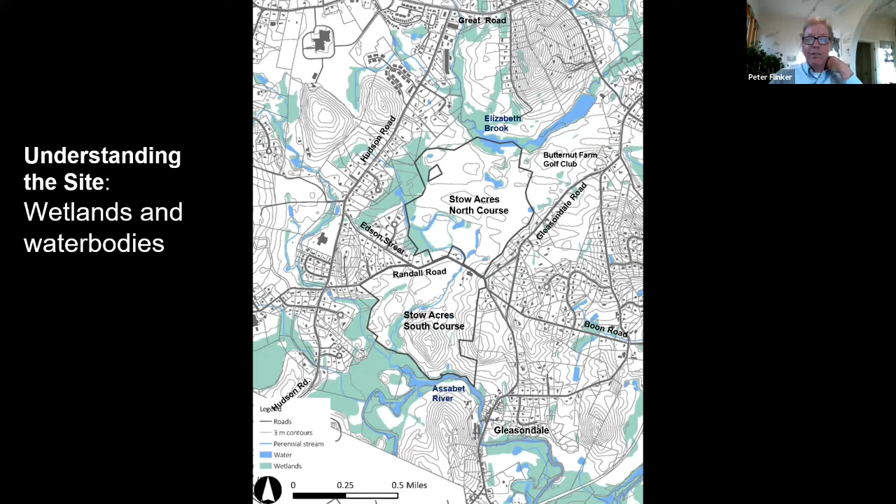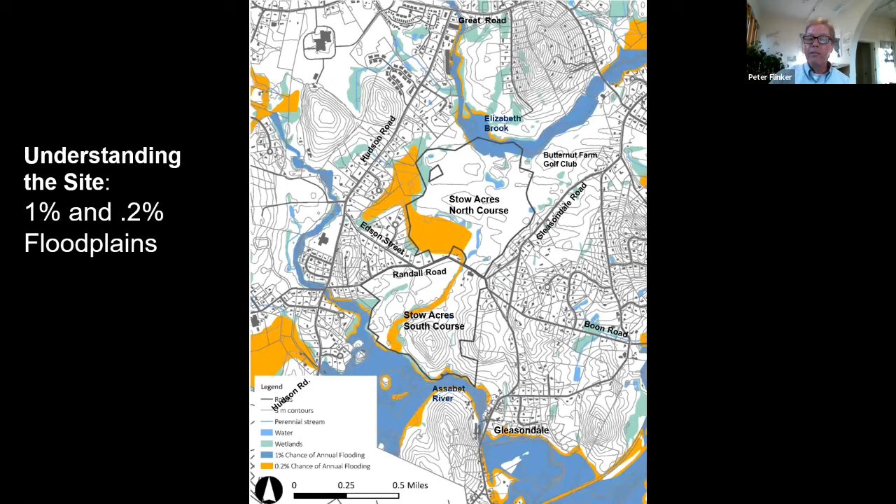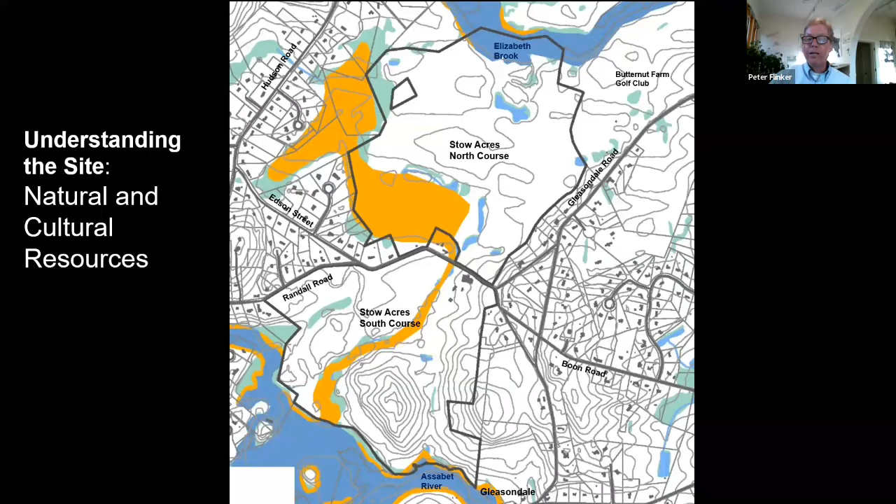We started by looking at the whole site in the context of the topography and drainage patterns in the area. We did a lot of mapping and overlaying different resources from state sources and surveys of the site, looking at wetlands and water bodies along the streams, and at areas in the floodplain that are more likely to flood during heavy rains. We also thought about how both the natural resources, the ecology, and the cultural resources, the history and scenic quality of the site, play out in the different areas of the property.

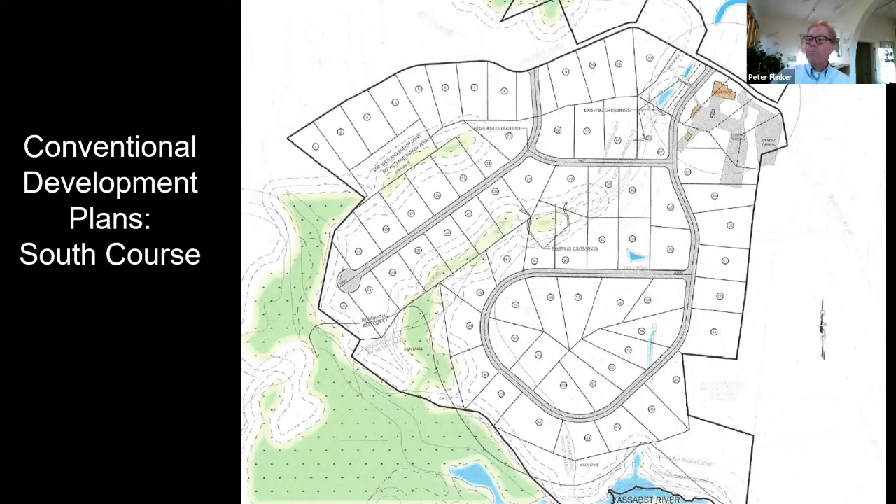This, if you attended the workshop in February, was the resulting master plan. It includes continued golf, at least for the next 10 years probably, a 9-hole golf course on 60 acres of the property. It also includes provision for perhaps 12 to 15 acres of recreational use that the town would establish through further planning and design, and what we have here is just a placeholder for that.

It includes the potential for a circumferential trail providing public walking and biking space throughout the property. As shown, this would be over 1.75 miles long. Around the site, particularly in the wetlands on the west part, there are buffer zones and reclamation areas so the native ecology could be rebuilt, perhaps even replacing some areas of the golf course with natural vegetation, bringing them back to wetlands and so on. You'll hear more about that in a little while.

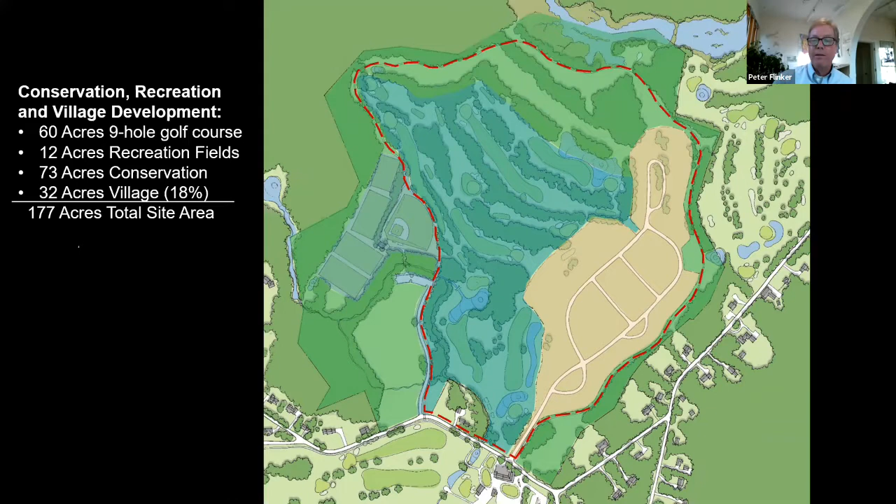Through this process, we also looked at developing part of the site as a walkable, compact village, which amounts to about 32 acres.

Looking at the entire site, we have the northern part with the different provisions for development and conservation I showed you, and then the entire south course of 151 acres would be preserved as permanent open space and kept in golf and other uses. There would also be a provision for a trail system on the south part extending from the north, from Elizabeth Brook to the Assabet River.

So if we look at the entire site of 328 acres, only about 32 acres would actually be developed for roads and buildings within the village, which is only 10%, which is really extraordinary. If you're familiar with conservation development, usually people are happy protecting half the site, but here we have the potential to protect much more.

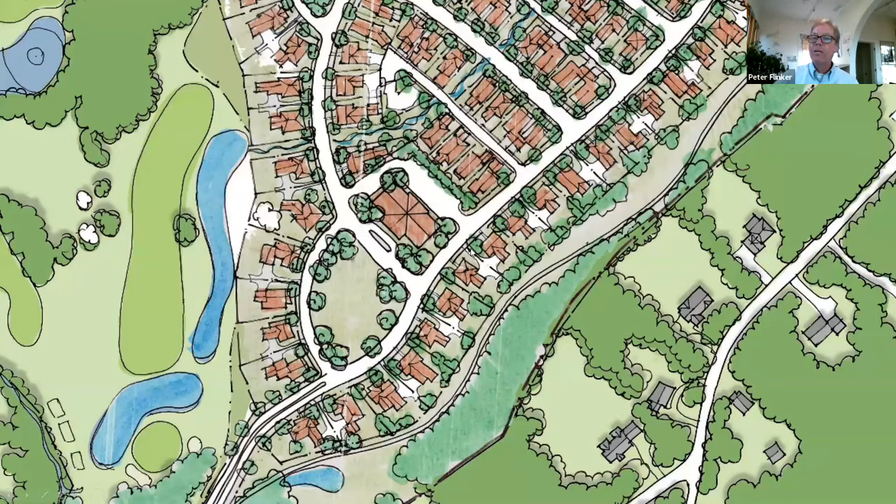So a very important part is that the buildings are organized around public spaces, whether the street or this kind of town green at the center. And we have different sizes of houses and different sizes of house lots. So there's a lot of built-in diversity.

And what that's really evolved into is this sort of guiding master plan. This includes the part of the site that's going to be developed. In addition to that, part of the development pod, if you will, are buffer zones along the outside that will incorporate that trail system, as well as setbacks against the neighboring properties.

There's areas to the north along the Elizabeth Brook, which will have the wells that'll serve the property. And again, these have to be protected along with this circular wellhead protection area. And then there's a lot of open space, as you see in green, that sort of winds through the development itself.

So we have sort of the wells to the north. We have part of it that's set aside for cottages on a shared lot, cottages on individual lots, what we call these interior lots, which have alleys in the rear providing access for garages, and exterior lots, which I'll show you have shared driveways. And then we have senior apartments, sort of in the core of the project, overlooking the town green. And then it hasn't been designed yet, but there's room for a small community center at the entrance of the property across from the Stow Acres Golf Club.

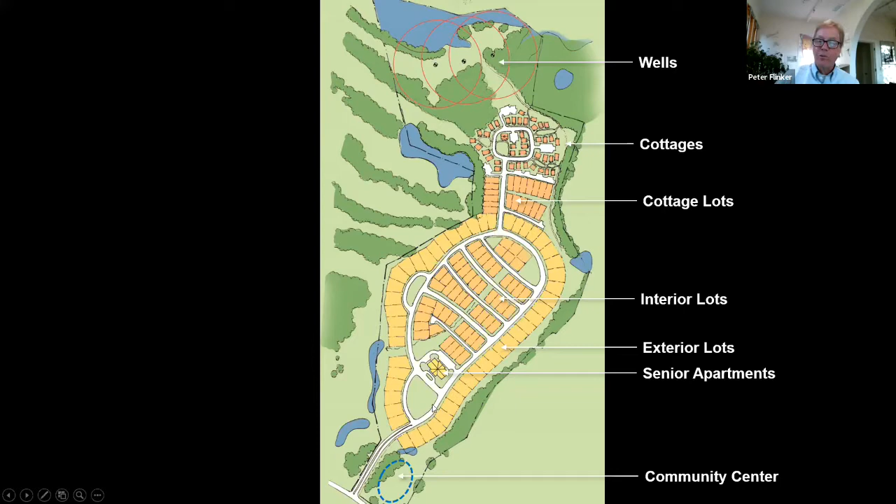So we're really going to be looking in the next few minutes at how these different lots might be arranged, again, so that they fit into the village, but also are very nice places to live. So we have these exterior lots, which are somewhat larger, and then within the property, these so-called interior lots.

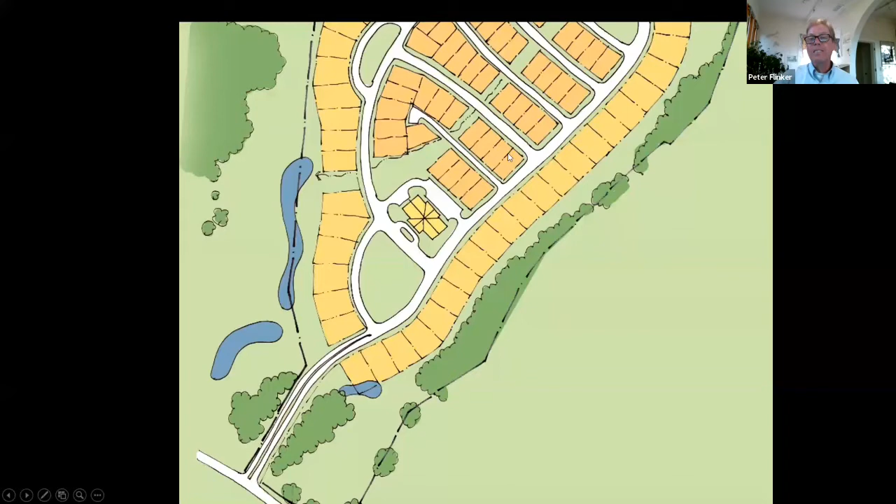So this is sort of two exterior lots. And one of the things we're trying to do, again, is to keep the parking available, but not let it dominate the scene, as it often does in a typical suburban development. So we're doing that by having shared driveways to a pair of garages that are what we call side-loaded. They're on the side of the buildings. And that allows us to eliminate half of the driveways along the street.

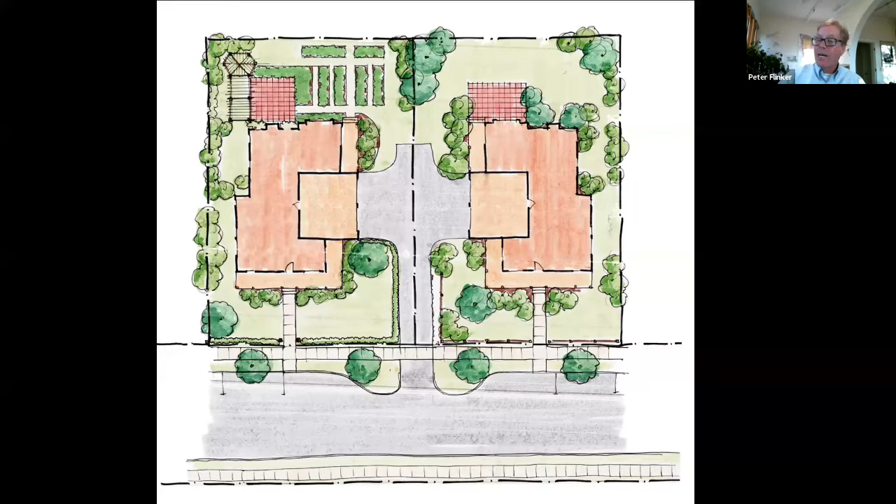And so the street can have wonderful sidewalks, street trees, and greenery, rather than a lot of parked cars and driveways. And in the rear, we have room for private gardens and patios and so on, and a lot of planting. Again, one of the advantages of having a more compact development style is that the investment in planting goes a lot further. So instead of being spread out over an acre and a half, it's used where it really can benefit in terms of creating a setting for those buildings and privacy for their inhabitants.

So again, if I could show you, 50 traditional village centers and towns in New England that people really love to live in, and they're designed much as this is designed. And so we're really picking up on those traditional planning principles.

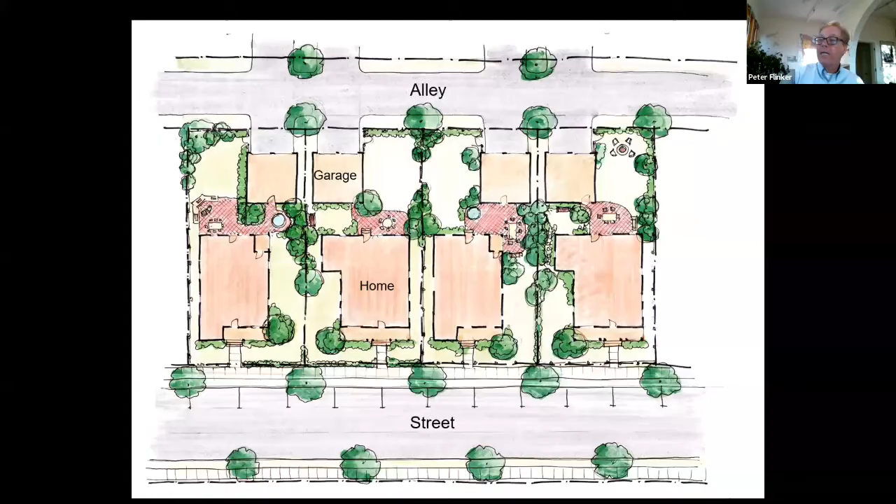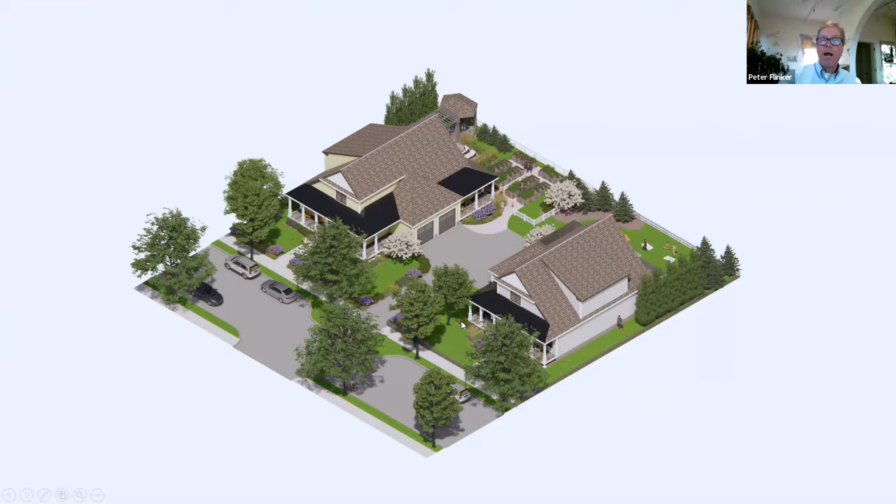And in the rear, you can see each house has room for some private gardens or just lawn space, patio space, barbecues, and what have you. And so it has all of the amenities that you might have in a larger suburban house. But here you have also the advantage of living in a wonderful village.

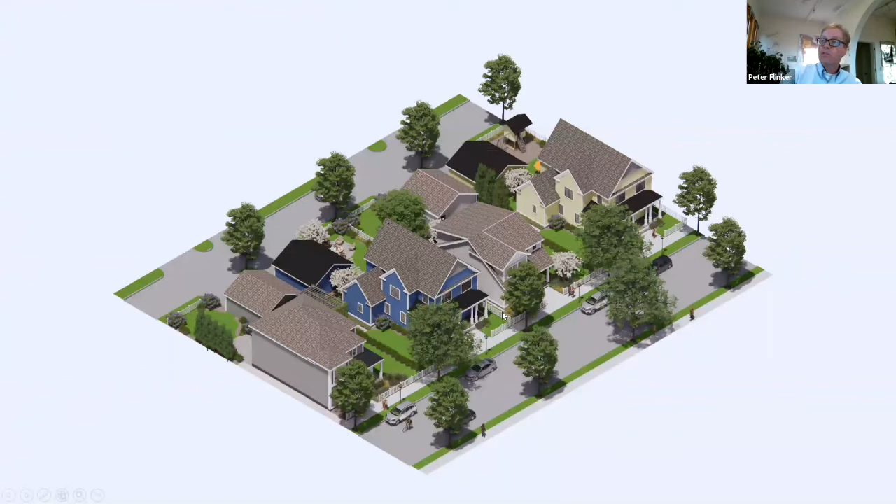And this is the lots that are with the rear, somewhat smaller lots with the rear alley, providing access to those garages. But again, it's the same idea where we have a shared village street with a separation of fences and hedges between the public sidewalk and the private gardens. And in the rear of the houses, in between the garages, we have lots of space for nice private gardens and trees and whatever people might want.

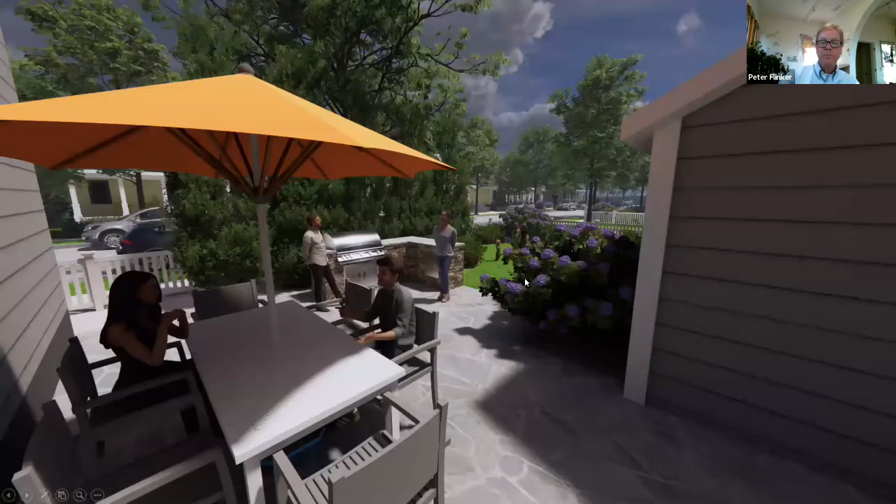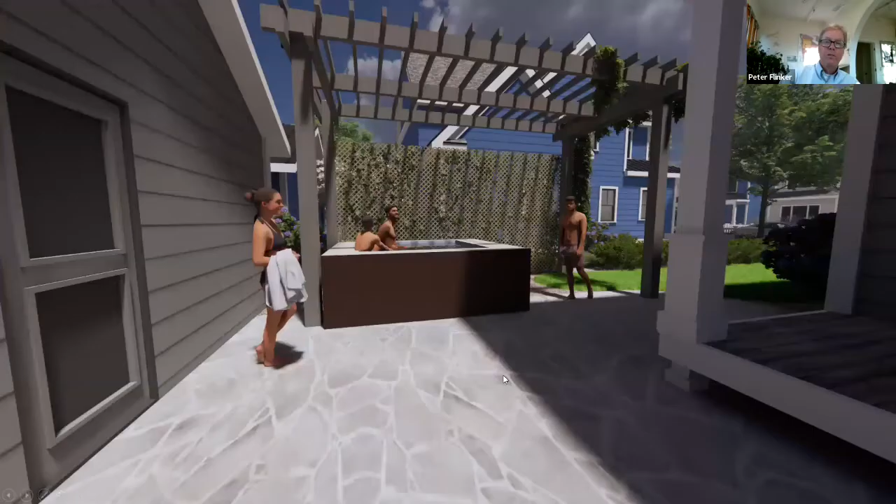And then plenty of room, as I said, for private patios and people to enjoy their barbecues and whatnot, or a little fire ring here in the backyard of one of the village homes, or a hot tub for people who want that. But again, a lot of these ideas in terms of the planting and the pergolas and screening is something that has been done for 100 years.

So we're really building that kit of parts again based on these traditional village planning elements because they work. And we know they add to the quality of our lives living in a village, and also make it a much better place for everybody.

So I'm going to turn it over to Mark O'Hagan now, who's going to speak about how this turns into the developer's vision of the property.

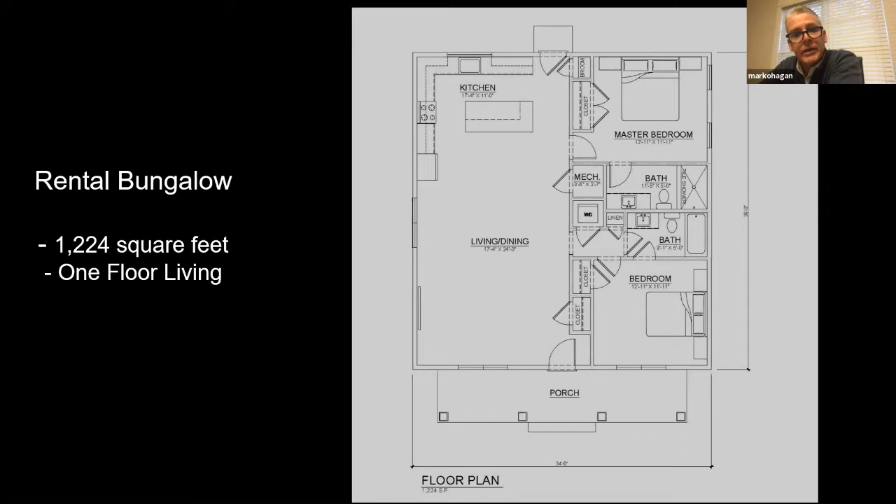I'll go through a floor plan on the next version, because the elements of the floor plans are pretty consistent throughout. We want to go to the next rendering, Peter.

I can show you the floor plan on this one, which is the next slide.

Mark, before you go on, I did have a question in the chat about the bungalow, the rental bungalow. Would this have a basement or other storage space areas in it?

The rentals would be on a slab, so there would be some closet space, and there would be some pull-down attic space as well for people to make use of. But the cottages are intended to be on a slab compared to having a full basement. The homes themselves would have full basements for full utilization for people.

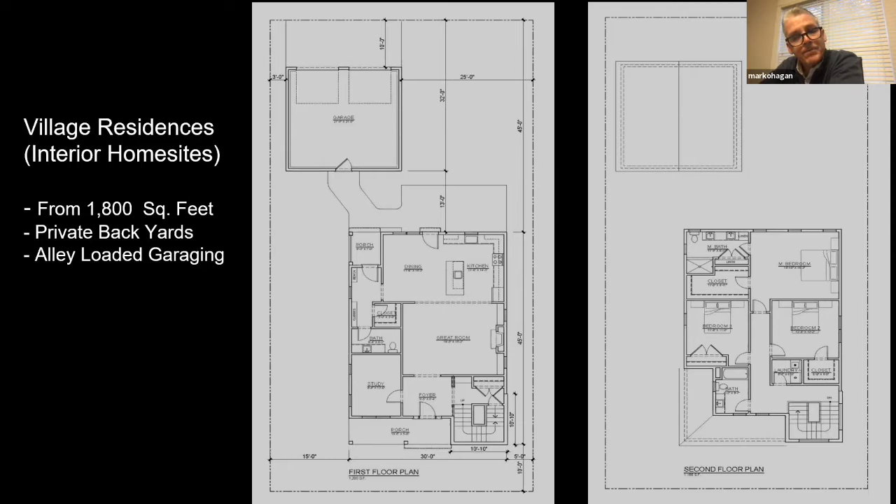We felt it was important to have a range of one level living for people that live locally or just want to be in the community, that may be concerned about dealing with stairs - your kind of classic empty nester layout. So we will have that, whether it's in the rental homes, this size homes, mid-range homes, or the village residences - they all have that ability, and still kind of keep the footprint as it relates to the front of the street the same as the other one, but bumped it out a little bit on the back.

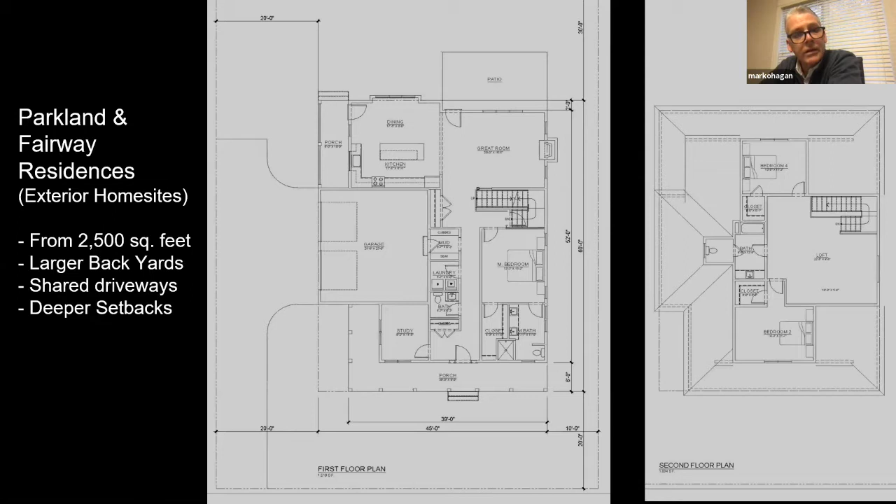These are looking to be much more modest residences, maybe 600-700 square feet. The affordable units in this building, we're targeting to be down as low as 50% of the median. So we can actually have rental apartments for qualified people as low as $1,100 a month. We situated it so it can be kind of an attractive building on this town common.

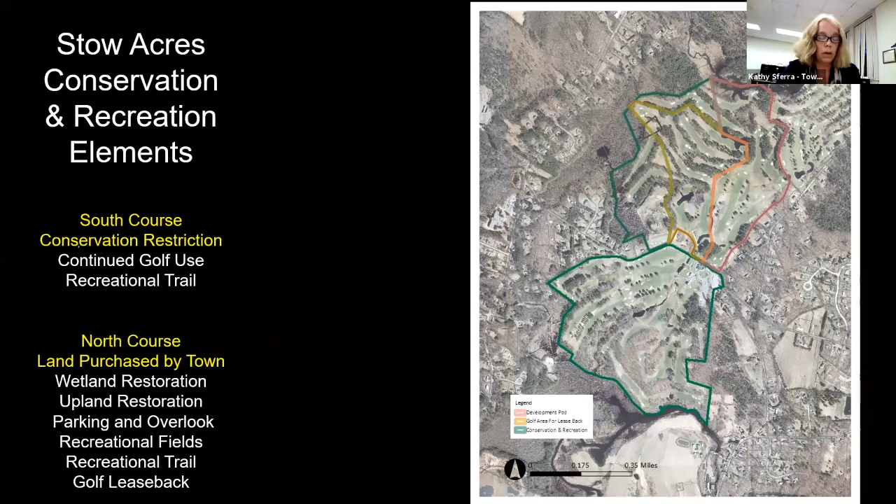As a reminder, the concept plan calls for the purchase of a conservation restriction for continued golf use on the south course, along with a recreational trail easement. On the north course, the land not proposed for development would be purchased by the town for a variety of conservation and recreation uses. I'm going to go through each of these in a little more detail. Next slide, Peter.

So turning first to the south course, we will be asking the town at town meeting next week to approve funding for purchase of a permanent conservation restriction on the entirety of the 151 acres of the south course. That conservation restriction would permanently restrict future development of the south course while allowing the land to remain in golf, and that would be owned and managed by Stow Acres.

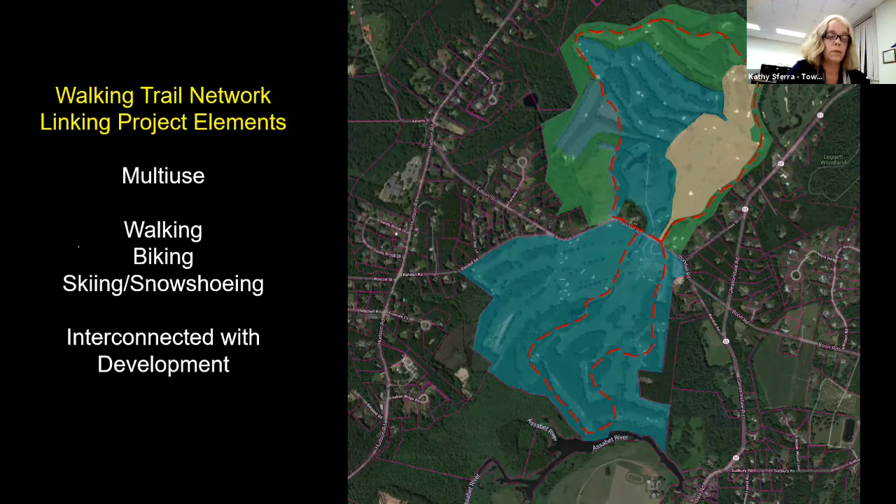And lastly, the North Course would also have a long distance trail looping around it and connecting the various elements of the project together, providing an amenity both for town residents and for residents of the development.

This project aligns really well with the goals and priorities contained in the town's open space and recreation plan. One of the highest priorities was for the town to plan proactively for the future of its golf courses and determine which areas are most important to protect and which are most suitable for development. Other priorities in the plan include identification of additional opportunities for walking and cycling in Stow, identification of a large site to meet future recreation needs, and more accessible trails for Stow's aging population. So this project aligns really nicely with those goals.

Some of the other goals met by the project include providing open space and recreation opportunities in what we refer to as the underserved, or southwest quadrant of Stow. That's the area south of Route 117 and west of Route 62. Also protection of scenic views, protection of riparian corridors along the Assabet River and Elizabeth Brook, and maintaining golf course use of the site. And with that, I will turn it over to Bob to wrap up.

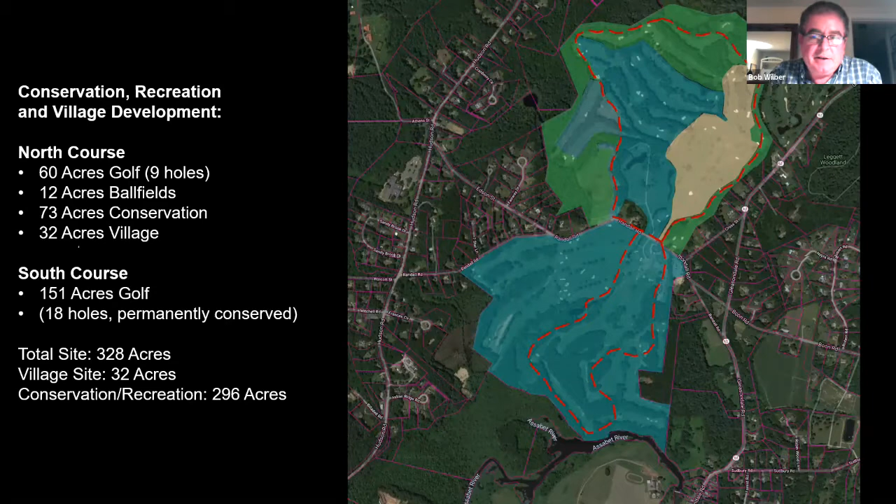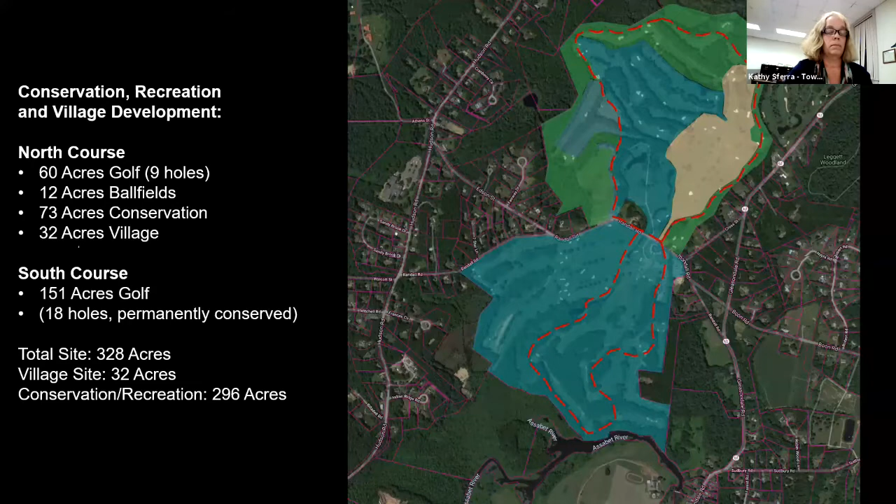Thank you, Kathy. I'm going to take a guess, and my guess is that a lot of the people in the audience tonight will be in agreement with me that what we're looking at is a really compelling opportunity for the town of Stow. Especially when you compare this opportunity, with all its different components, with the other option: if the property were developed under traditional subdivision or even under our open space subdivision bylaw, large portions of the property would be consumed by residential development. The community benefits would be much more narrow, accruing primarily to those who could afford to live in those very large homes on very large lots.

Instead, what we're looking at is a 330 acre footprint that has tremendously compelling conservation components that Kathy just walked us through, fantastic additional active recreation capacity, and exactly the types of housing that we most need in Stow. And we know what we need. We've known that for years, as Jesse described.

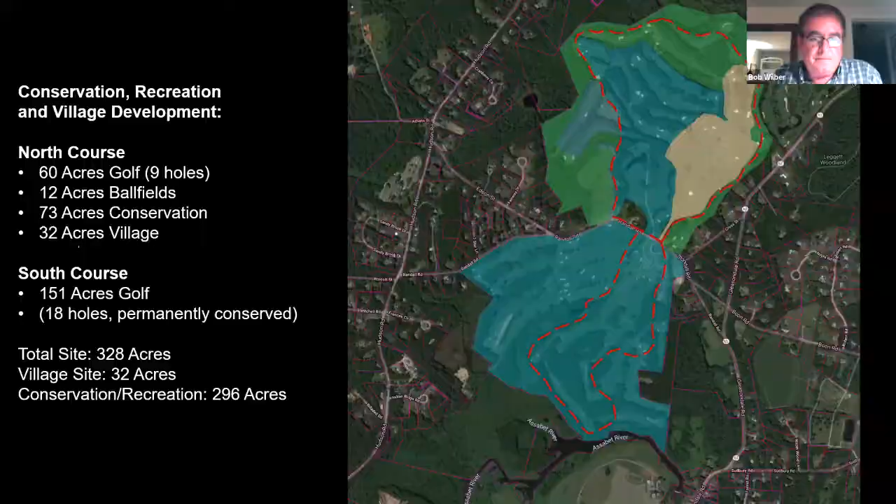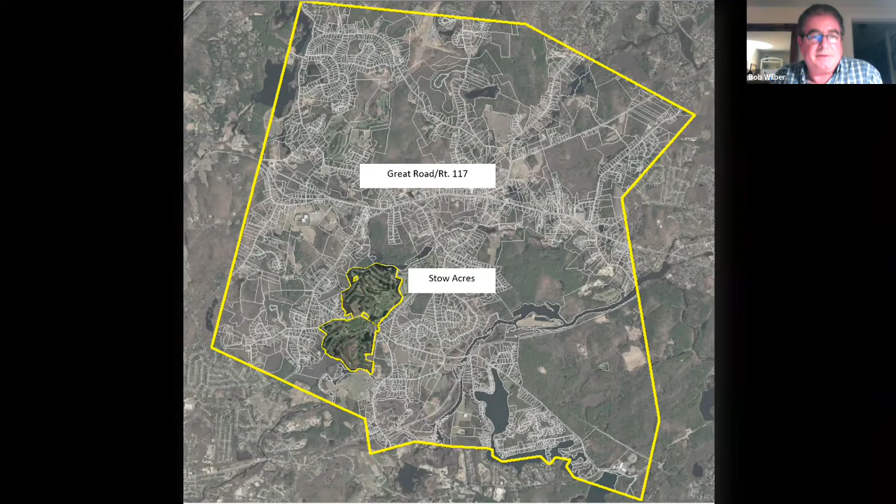It's also a comprehensive outcome. It answers the question once and for all, just what's going to happen with the 330 acres that exists at Stow Acres Country Club.

Golf is one of the defining elements of the town of Stow. In many ways, it's golf and orchards in so many ways. So this project assists golf continuing as an active land use on this landscape off into the future.

What's also important is that Stow Acres is a particularly important golf course among the many golf courses that we're so fortunate to have in town. Stow Acres has the Randall Homestead, with its historic significance. And perhaps more importantly, it was the location of the Black men's national championships in the 1920s. Those are things we should be really proud of. So helping preserve Stow Acres, especially the South Course, which was the site of that national championship in the 1920s, preserving that off into the future is a really important piece.

It also, as Kathy just described so well, has fantastic open space protection components overall, between the active recreation, the conservation restriction on 150 acres in the south, the town's purchase of 112 acres on the north, and even the green spaces within the housing pod. Fully 90% of the open space that exists at Stow Acres will be preserved going forward.

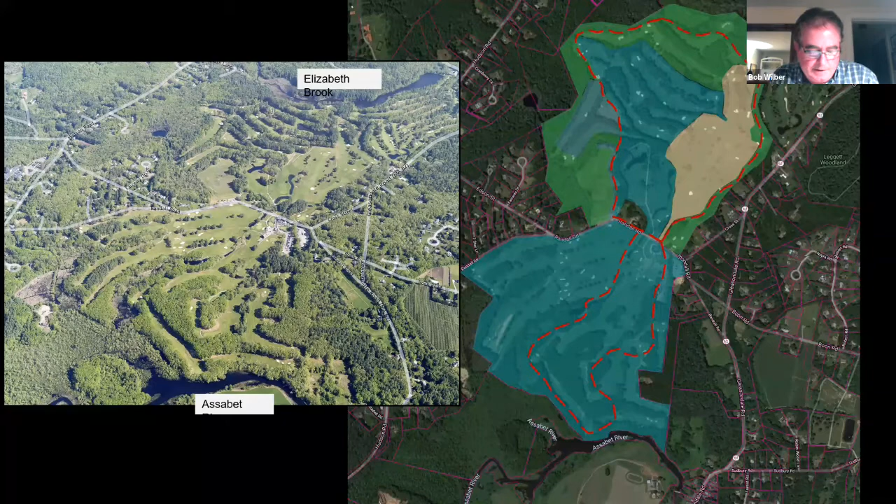And it will provide access opportunities. Trails are a big theme here, not just as an enhancement for the development, for the housing pod and those who live there - that will be a tremendous amenity for those folks right out their back doors, as an integrated part of the overall landscape. But it will also be a destination for everyone who lives in Stow, whether you're a young family or a senior, to go and enjoy the outdoors on this and have better connections with things like the Assabet River and Elizabeth Brook.

It also just happens to be located in the southwest quadrant of Stow, where it's really been underserved historically. Stow is a town where conservation has been a priority and something the community has supported since the beginning of time. And yet the southwest quadrant is the area where we need additional progress, so that the provision of open space is more equitable throughout town. This is a golden opportunity to do exactly that.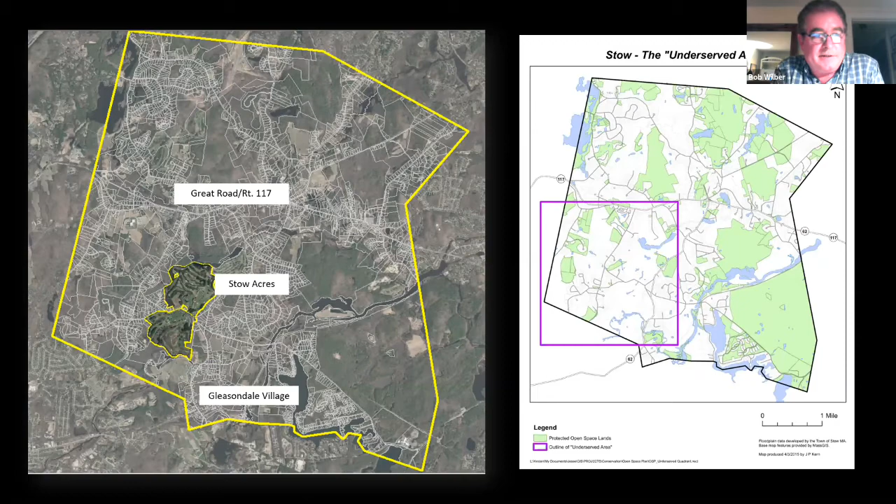In terms of the additional recreation facility potential here, especially as golf phases out, it's really tremendous. We're talking about flat, for the most part, dry, good soils. Really, some of the best opportunity that I know of in town is what we're looking at right here.

It also provides opportunities for additional community garden capacity if that's something we wanted to do. And even a community pool if we wanted to build one on this site. That's something we could do. There'll be plenty of room to do that.

As important as all of the things I just talked about are, I've actually come to think that the most important part of this whole thing is the housing components, because they deliver the types of housing with a big, big focus on affordability at all levels. So it's really smaller structures on smaller lots for smaller selling prices. That's really what we're talking about here.

Doing it through the collaborative approach we've had with the Conservation Trust, the town planning and conservation stakeholders, working with the owner, the developer, and the very talented planner Peter Flinker, we have this wonderful concept of New England village design and a very livable, high quality of life environment that's being created. And the designs, I think, are beautiful, all of them.